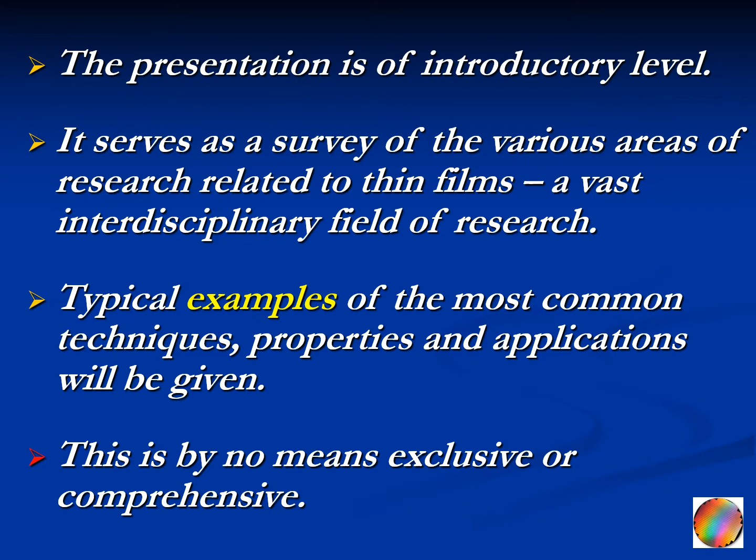Let's first talk about materials research and its importance. Material science and engineering is a discipline at the interface of science and engineering whose activities include the development of new materials with novel properties, improvement of properties of existing materials, studying the relationships between structure of materials at length scales ranging from 1 nanometer to 1 meter.

It also includes the discovery of new methods of economically synthesizing, making, and processing materials and components with desired properties. It also includes development of new techniques for characterizing the structure and properties of materials. Material science and engineering is also important for predicting the performance of materials in engineering applications.

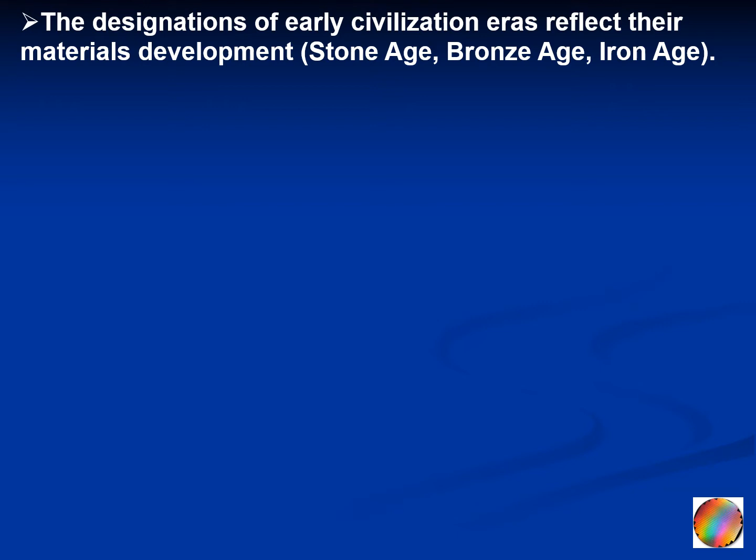The designations of early civilization eras reflect their materials development. The Stone Age, the Bronze Age, the Iron Age are all connected to specific materials. The technological progress in modern societies has been even more intimately associated with advances in material science and engineering.

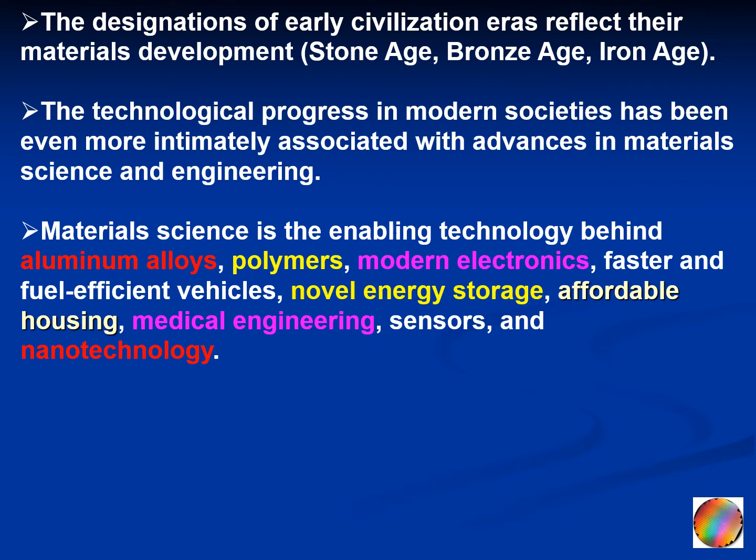Material science is the enabling technology behind aluminum alloys, polymers, modern electronics, faster and fuel-efficient vehicles, novel energy storage, affordable housing, medical engineering, sensors, and nanotechnology.

Materials science lies at the foundation of many areas, including forensics, biomedical applications, aerospace materials, mathematical modeling, craft and design, chemical engineering, quantum physics, and molecular genetics.

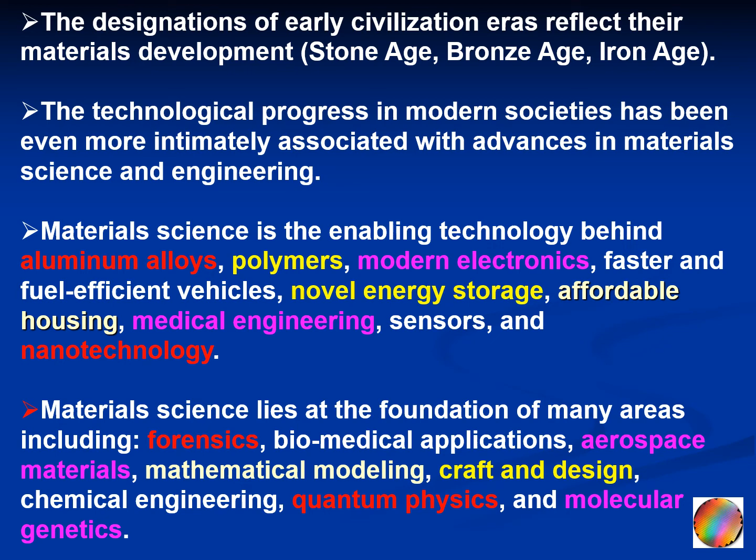The present and future challenges and opportunities in the field of material science and engineering are more exciting than those of the past, as engineers develop materials for more demanding applications.

There is a continuous search for materials with higher stiffness and strength to weight ratios for aerospace applications. Electronic materials that allow faster data processing are being sought. Jet engine materials of lower weight, which allow safe operation at higher temperatures, are being developed.

More corrosion-resistant materials for chemical industries are needed. High-temperature superconductors that may revolutionize the use of electrical power have been discovered recently and are being studied.

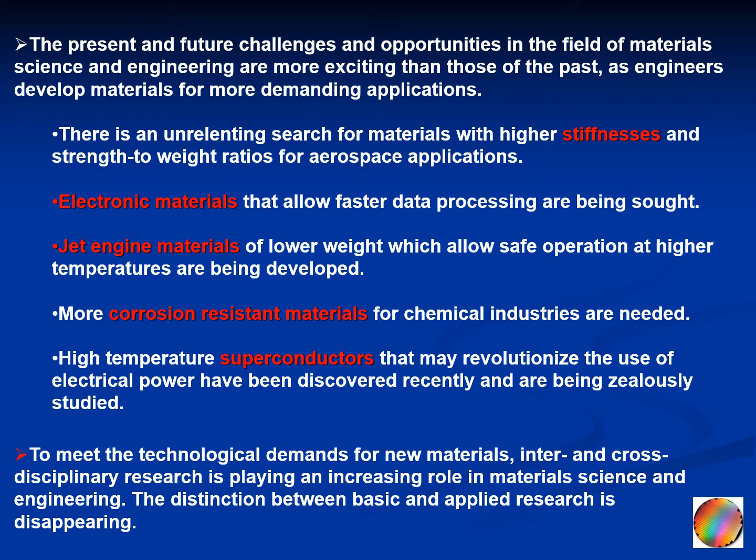To meet the technological demands for new materials, inter- and cross-disciplinary research is playing an increasing role in material science and engineering. The distinction between basic and applied research is disappearing.

What is the connection between materials and industry? Why do we need to do materials research for industrial applications? Major technological breakthroughs came after advances in materials research. Materials research is at the core of modern technology.

Various industries depend heavily on materials research, such as the petrochemical industry and the power industry. Examples of problems tackled by materials scientists include the study of corrosion, the development of ceramics, the development of fuel cells, and the development of sensors for various applications.

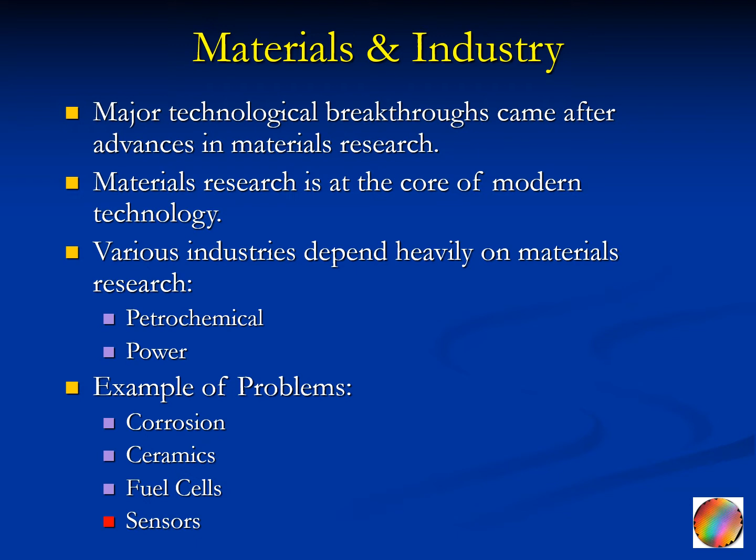So that was a brief introduction about materials research, materials science and engineering, and its importance in our daily life. Let's now start our discussion of thin films, and we will first talk about the deposition techniques that are used to synthesize, to make, to fabricate the thin films.

We have first to talk about surface engineering, which is very related to thin films, because thin film synthesis or deposition can be categorized as a surface engineering process.

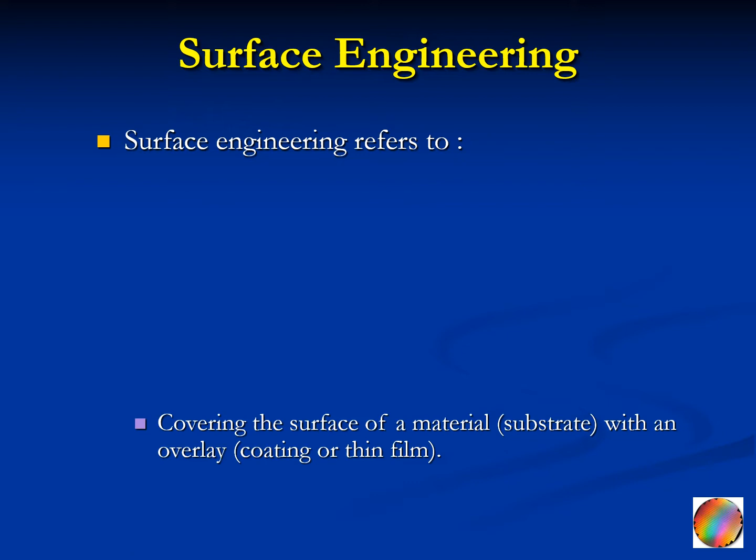Surface engineering refers to two things: covering the surface of a material, like a substrate, with an overlay, with a layer, and that means coating the substrate with a coating or thin film. It can also refer to modification, changing the properties of the surface of a material. So surface engineering can mean any one of these two.

In the first process, in which we cover the surface with a layer, the substrate material is not detectable. In the second process, the substrate material is still present on the surface.

Here are some surface modification techniques used to modify the surface of a material. They can be chemical processes like wet processing, exposing the surface to acidic or basic environments. They can be oxidation, where you let a stream of oxygen at high temperature pass over the surface to oxidize it. They can be anodization of the surface with certain metal. All of these are chemical processes.

We can also have physical processes like sputtering the surface, bombarding it with ions to change its properties. And we can do ion implantation, where we bombard the surface with high energy ions that penetrate the material and change its properties.

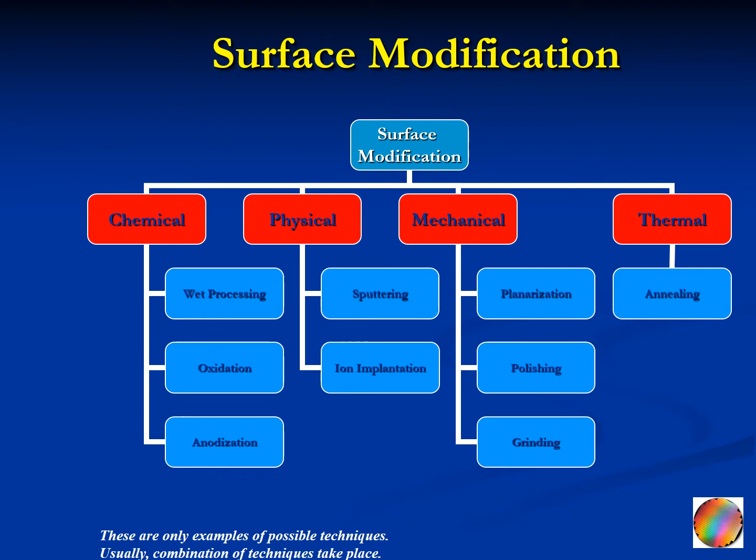Now let's talk about thin films. What is a thin film? The term thin film is applied to layers or coatings which range in thickness from a few atomic layers to several microns. So roughly we can say that the thickness of a thin film ranges from 10 nanometers all the way to 10 micrometers.

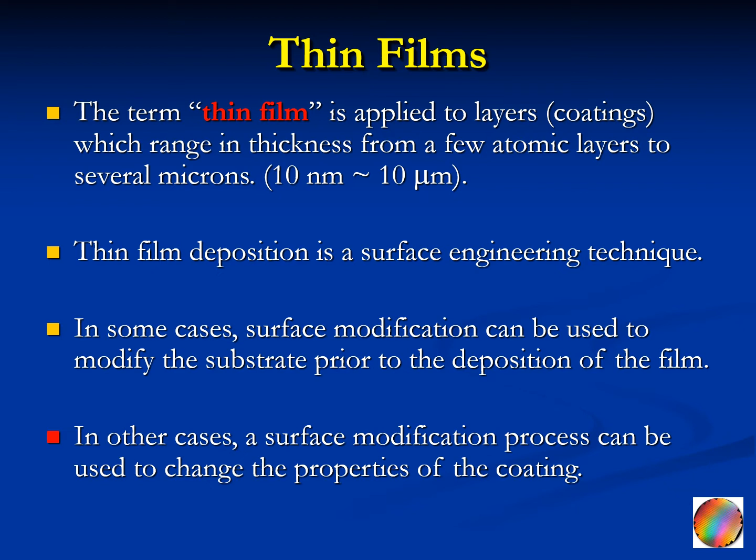Thin film deposition is a surface engineering technique. In some cases, surface modification can be used to modify the substrate prior to the deposition of the film—that means to prepare the substrate to accept the film, you have to do some of the preceding surface modification techniques before deposition. In other cases, a surface modification process can be used to change the properties of the coating after its deposition.

So let's now look at the deposition techniques. How do we make the thin films? How do we synthesize or deposit them?

Any thin film deposition process involves three main steps. First, the production of the appropriate atomic, molecular, or ionic species. You produce the material from which you make the film, and then you carry that material to the substrate, to the surface on which you want to grow the thin film.

The second process is the transport of these species to the substrate through a medium. The medium can be gaseous or liquid. The third step is the condensation on the substrate of these species, either directly or through a chemical or electrochemical reaction, to form a solid deposit, which is what we call the thin film. Now, we will see many techniques, but they all share these three basic steps to synthesize the thin film.

Here is an example of the techniques used to deposit thin films. If you read the literature, you will find hundreds of techniques to synthesize thin films. This is just a sample of the most famous techniques used to make thin films.

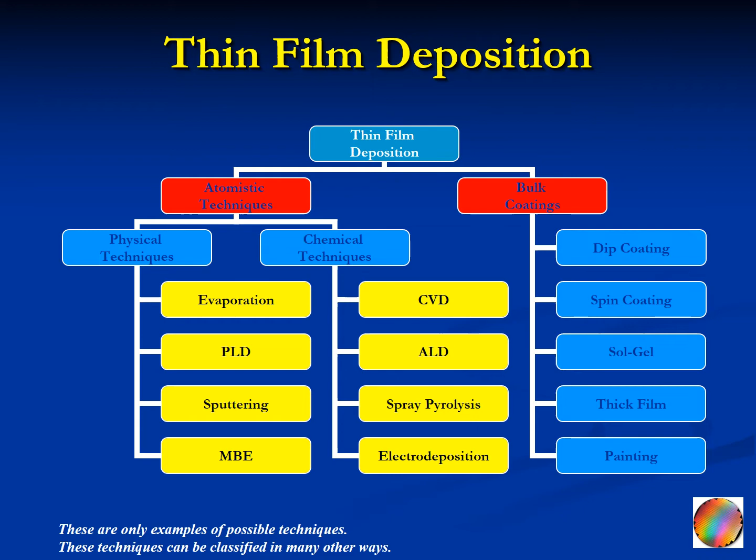The bulk coatings include techniques like dip coating, spin coating, sol gel, thick film, and painting. The way we will go through these processes is we'll classify them as you can see here.

So another way to classify the thin film synthesis techniques is to classify them as vapor techniques, in which the thin film is made in a gaseous medium, or solution techniques, in which the thin film is made in a liquid medium. We will look at these 5 main techniques that are widely used to grow or deposit thin films.

Let's start with the evaporation technique, which is a vapor technique. It goes in a gaseous medium.

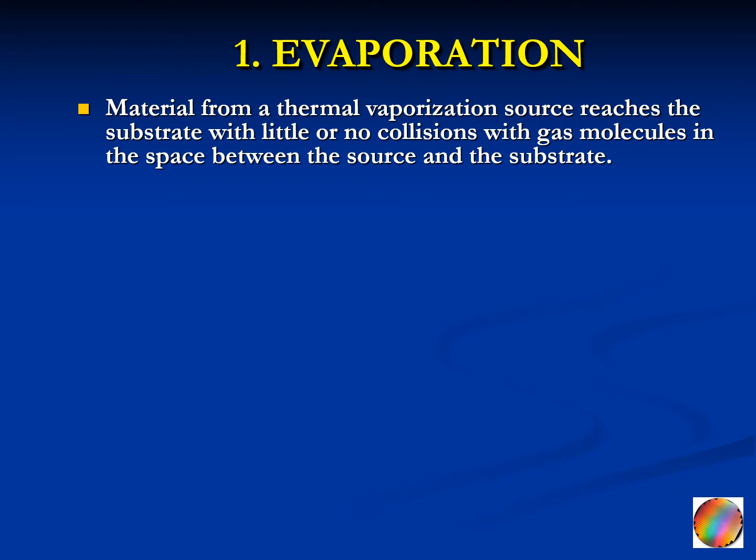These atoms or molecules will travel from the source into the substrate. Once they impinge on the substrate, they form the desired thin film. The substrate can be on top of the source, it can make an angle with the source, and it can also rotate to make the film uniform.

Vacuum deposition takes place in the gas pressure range of 10 to the minus 5 to 10 to the minus 9 torr. By that we mean we need to evacuate the space between the source and the substrate, and that will do two things. First, it will reduce the collisions between the molecules and the gaseous species, the air molecules. Second, it will result in very low contamination of the film, because it's done under vacuum. The only thing that is there are the species that you are vaporizing from the source.

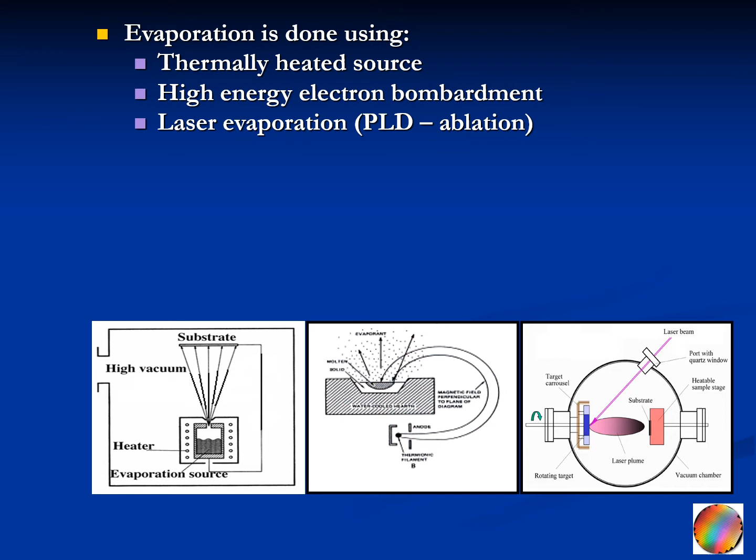The third technique is like the second one, but instead of using an electron beam, you use a laser. You heat the source using a pulsed laser beam, which produces a lot of heat to vaporize the material, and again this vapor will impinge on the substrate and synthesize the desired thin film. This third technique is called pulsed laser deposition or pulsed laser ablation.

Vacuum deposition is used to form optical coatings, permeation barrier films, electrically conducting films, wear-resistant coatings, and corrosion protective coatings. These three techniques are broadly called PVD techniques, which stands for physical vapor deposition.

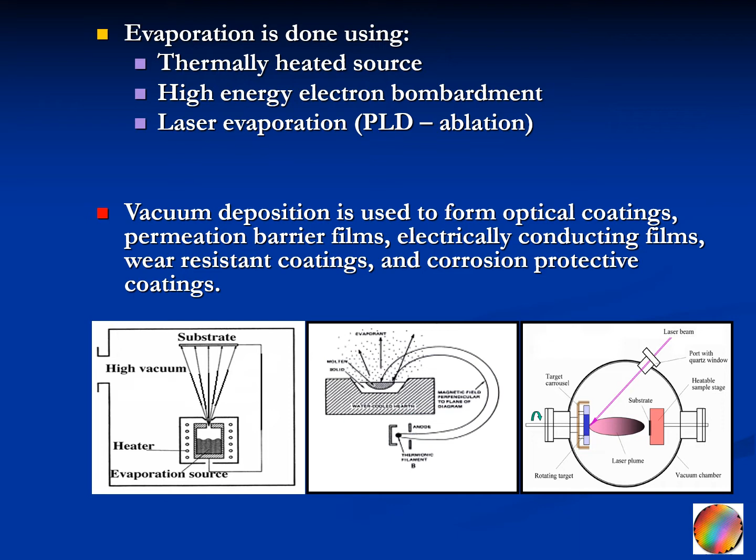Surface atoms are physically ejected by momentum transfer from the ions. Sputtered atoms travel until they strike a substrate. So here it is like evaporation, except that instead of heating, now we bombard with ions. But the end result is the same: species come out of the target, travel through some distance to impinge on the substrate and make the thin film. So sputtered atoms travel until they strike a substrate, where they deposit to form the desired layer.

The bombarding particles are ions, created by applying a high voltage to an inert gas, forming what we call a plasma. The target can be an element, an alloy or mixture, or a compound.

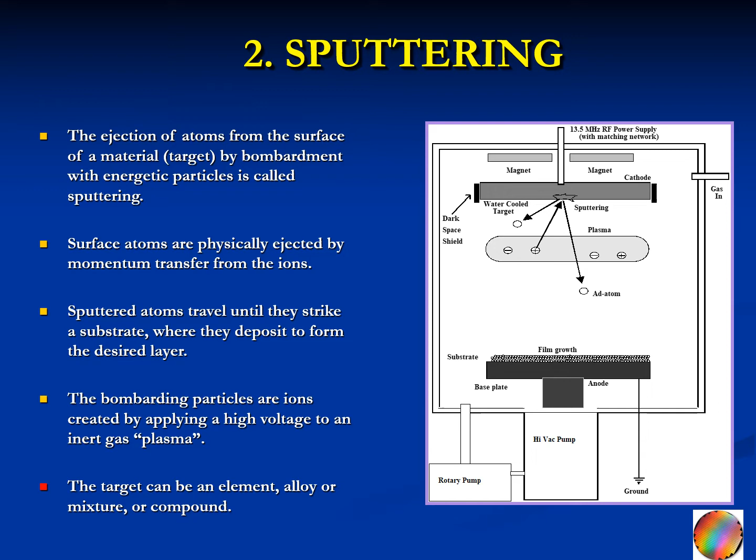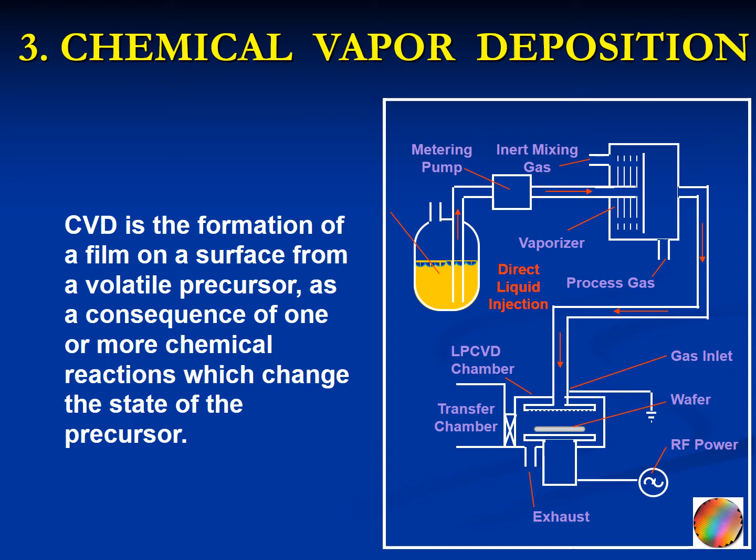The third vapor technique is an extremely important technique, very widely used, and that is chemical vapor deposition, abbreviated as CVD. CVD is the formation of a film on a surface from a volatile precursor in the gaseous state, as a consequence of one or more chemical reactions which change the state of the precursor. That is illustrated in this diagram here. The CVD technique is a very complicated technique, but it is worth the complication because of the advantages that we will talk about shortly.

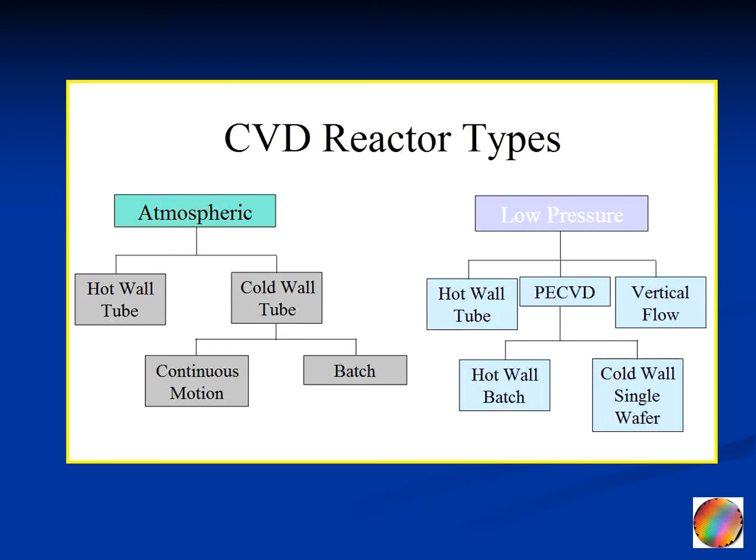CVD can come in many variants. Here are some of the techniques, all of which fall under chemical vapor deposition, and each one is very widely used to grow certain types or classes of materials. There are many variants; we have seen just some of them. One of the most commonly used is MOCVD, metal organic chemical vapor deposition. You can also have vapor phase epitaxy, atomic layer deposition, and even MBE, molecular beam epitaxy, which can be broadly categorized as a CVD technique. What are the advantages of CVD?

One advantage is the high growth rate achieved by this technique, which makes it economical. You can grow very thick films in a relatively shorter time compared to other techniques. It can deposit materials which are hard to evaporate, so when evaporation by thermal, E-beam, lasers, or sputtering fails, CVD offers an alternative that can work. It is characterized by good reproducibility of the films grown, and it can grow epitaxial films, which is an extremely important advantage of the CVD technique.

But there are some disadvantages of this technique, such as the high temperatures. You have to grow films on substrates heated to very high temperatures compared to other techniques. It is a very complex process, and sometimes the gases used are toxic and corrosive.

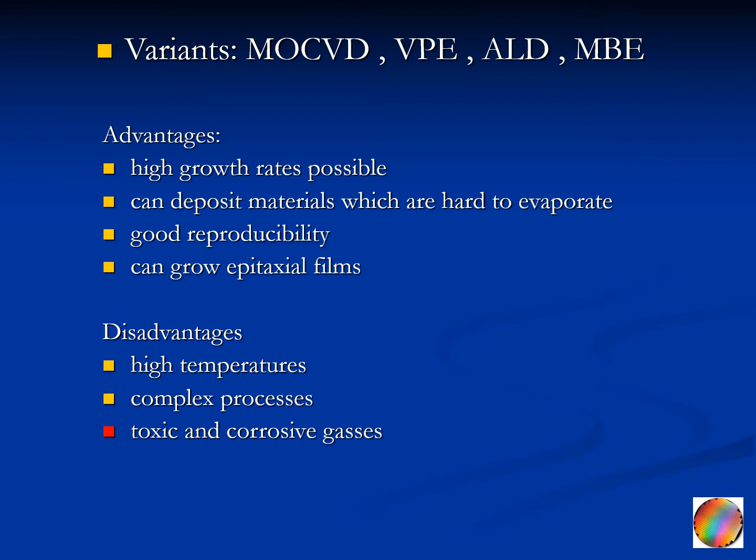So these are the vapor techniques. We talked about three of them: evaporation, sputtering, and chemical vapor deposition. And we have seen that under each one of them, you can have many processes.

Let's now move into the solution techniques, techniques that involve the presence of liquids. Here we will talk about two main techniques. The first one is the sol gel, and we will see that under the sol gel there are many sub-techniques.

This process involves the transition of a material from a sol with fluid-like properties to a gel with solid-like properties. The sol is made of colloidal solid particles of submicron diameter, usually inorganic metal salts, dispersed in a liquid metal organic precursor called an alkoxide, dissolved in a solvent. Aggregation or polymerization leads to the development of an interconnected solid network with an interspersed continuous liquid phase, and that is the gel.

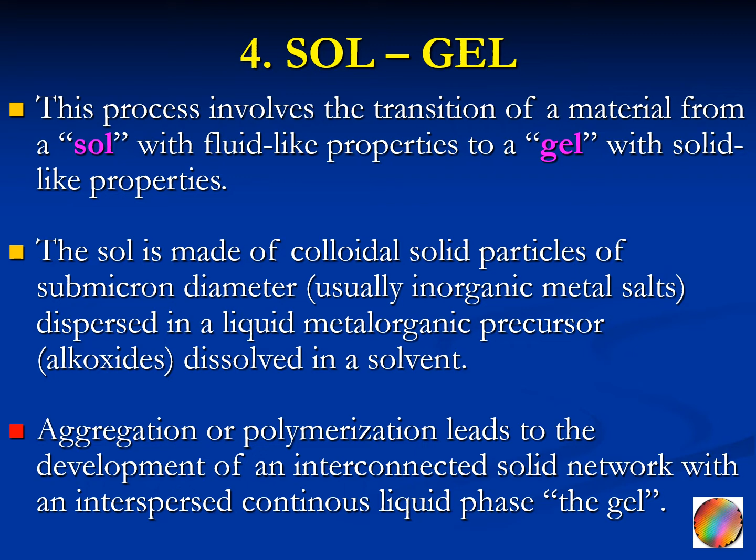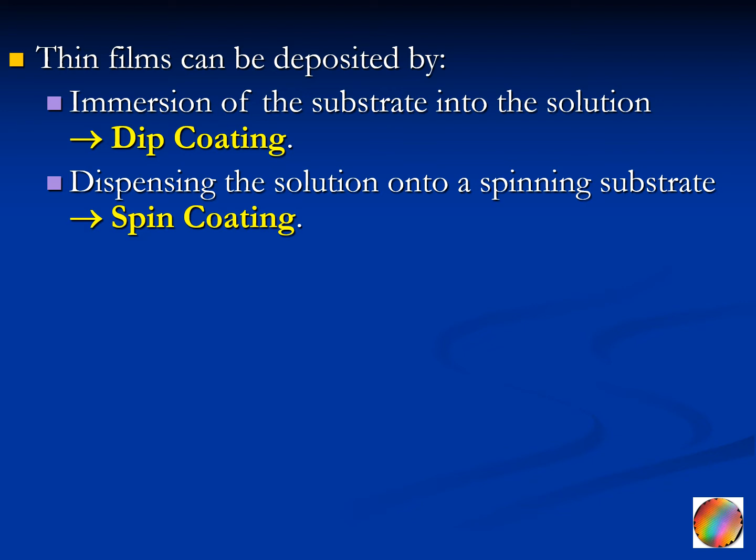So the gel is made. Now, how do we make the film? Thin films can be deposited by immersion of the substrate into the solution; in that case it is called dip coating. Or by dispensing the solution onto a spinning substrate, called spin coating. Or by spraying the solution onto the substrate, called spray pyrolysis. So dip coating, spin coating, and spray pyrolysis are variants of the sol gel technique.

Following film deposition, thermal treatments cause a host of other processes like drying, solvent evaporation, densification, and crystallization that shape the structure of the coating. Usually sol gel is done at room temperature, so you have to heat the film after deposition to solidify it and give it better crystallinity.

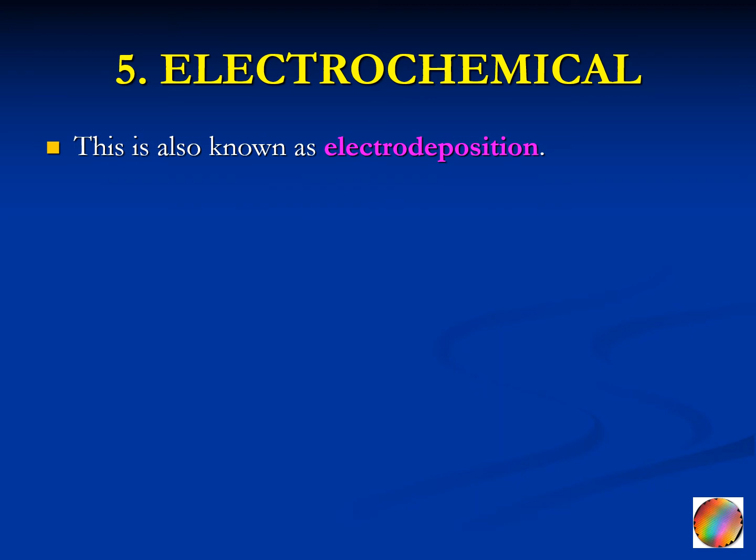The second solution technique is called the electrochemical technique, also called electrodeposition for brevity. Coatings can be made by anodic or cathodic synthesis. In the anodic method, a metal ion or complex is oxidized at the electrode surface. In cathodic synthesis, the cathodic process is used to generate a base at an electrode surface. Metal ions or complexes are then hydrolyzed by the electrogenerated base to form a cathodic deposit.

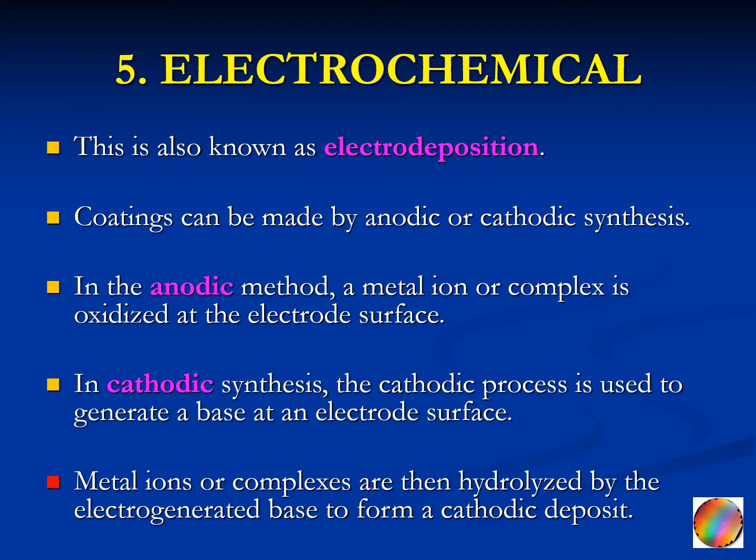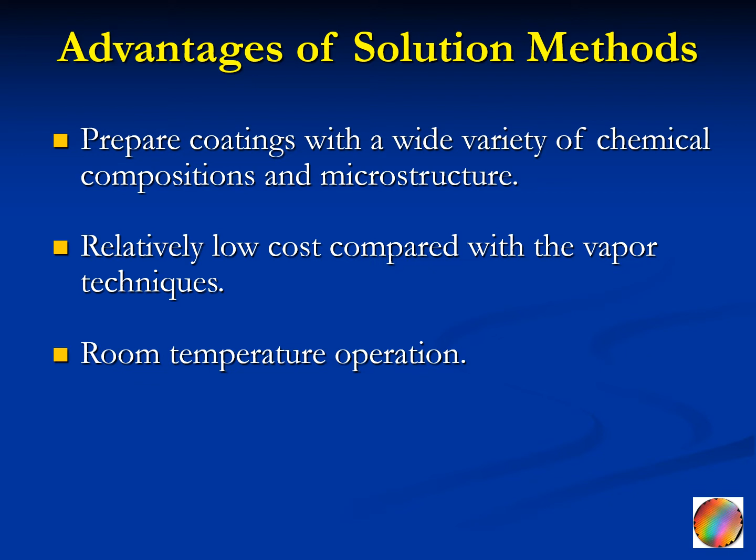What are the advantages of solution methods? With solution methods, you can prepare coatings with a wide variety of chemical compositions and microstructures. They are relatively cheap compared with vapor techniques, since solution techniques do not need any vacuum. They operate at room temperature, so you don't have to heat the substrates before film deposition. They can deposit on any geometry, flat, cylindrical, or spherical, and they are commercial because they can produce coatings on a large scale.

Finally, let's talk about nanostructured coatings.

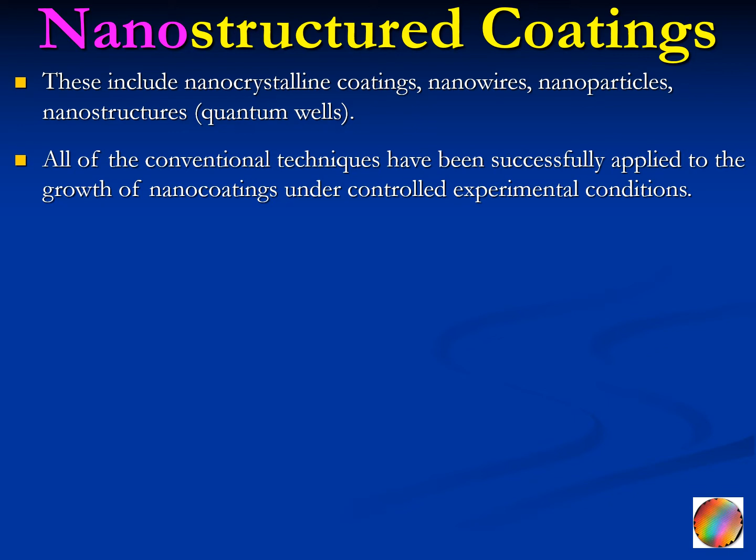These include nanocrystalline coatings, nanowires, nanoparticles, and other nanostructures such as quantum wells. All of the conventional techniques that we talked about have been successfully applied to the growth of nanocoatings under controlled experimental conditions. There are two approaches to nanogrowth: the first is the top-down approach, like the one used in lithography, and the second is the bottom-up approach, where you grow the nanostructures from the bottom and let them grow vertically upward.

Some techniques produce nanostructures directly. Other techniques produce nanostructures by post-deposition. That means you make the film, and then after the film, post-deposition, you let it go through one or more of these processes to produce the nanostructures. The post-deposition processes include annealing, heating the film under certain atmosphere at certain temperature for a certain duration of time, or chemical etching, ion beam bombardment, or laser processing. All of these have been proven to produce nanostructured coatings out of typical or regular thin films.

And that brings us to the end of the second part of the seminar, which is the deposition of thin films. Let's now move into the third part, in which we talk about the growth mechanisms of thin films.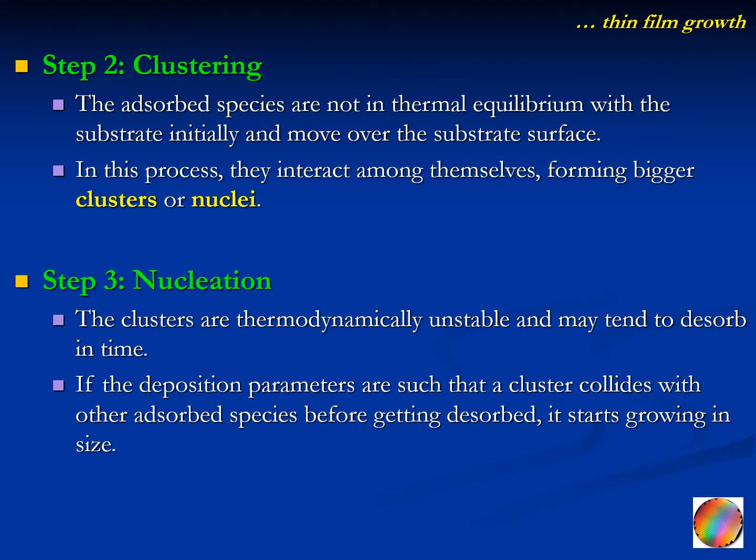And that will lead to the third process, which is called nucleation. The clusters are thermodynamically unstable and may tend to desorb in time. If the deposition parameters are such that a cluster collides with other adsorbed species before getting desorbed, it starts growing in size. After reaching a certain critical size, the cluster becomes thermodynamically stable and the nucleation barrier has been overcome, and that's the nucleation process.

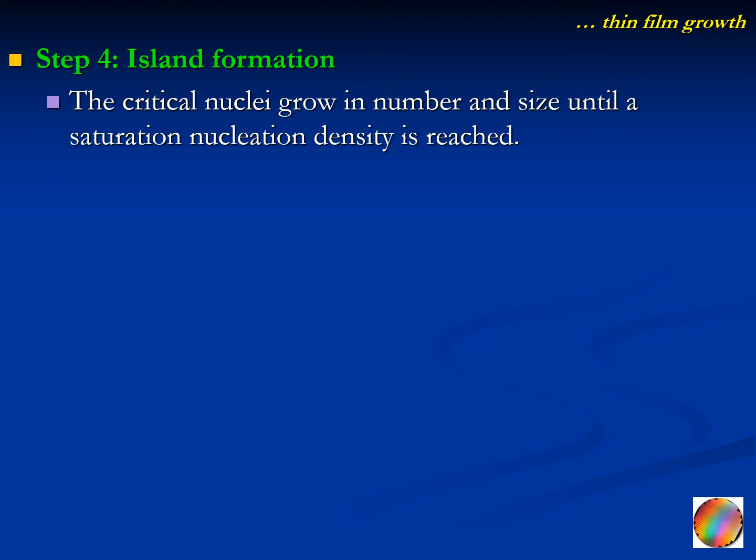After the nucleation comes the island formation. So they go step by step. The critical nuclei grow in number and size until a saturation nucleation density is reached. This is influenced by the energy of the incident species, the rate of impingement, the activation energies of adsorption, desorption, thermal diffusion, and the temperature, topography, and the chemical and crystalline nature of the substrate. So it is a very dynamic, thermodynamic process.

A nucleus can grow both parallel to the substrate by surface diffusion and perpendicular to the substrate by direct impingement of the incident species. However, the rate of lateral growth is much higher than the perpendicular growth. The grown nuclei are called islands.

After the formation of islands, we have coalescence. What is coalescence? It's merging or melting or fusion of the islands. So, in this stage, the small islands start coalescing, merging together with each other in an attempt to reduce the substrate surface area. This tendency to form bigger islands is termed agglomeration and is enhanced by increasing the surface mobility of the adsorbed species, for example, by increasing the substrate temperature.

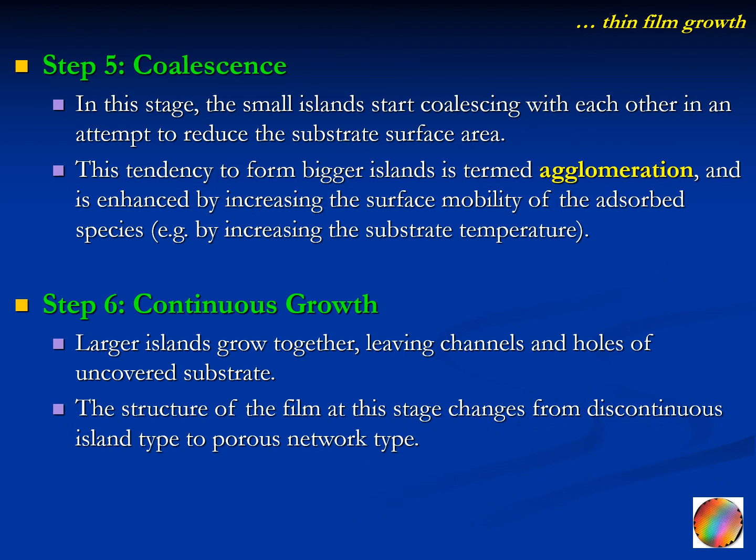The final step is continuous growth. Larger islands grow together, leaving channels and holes of uncovered substrate. The structure of the film at this stage changes from discontinuous island type to porous network type. Filling of the channels and holes forms a completely continuous film.

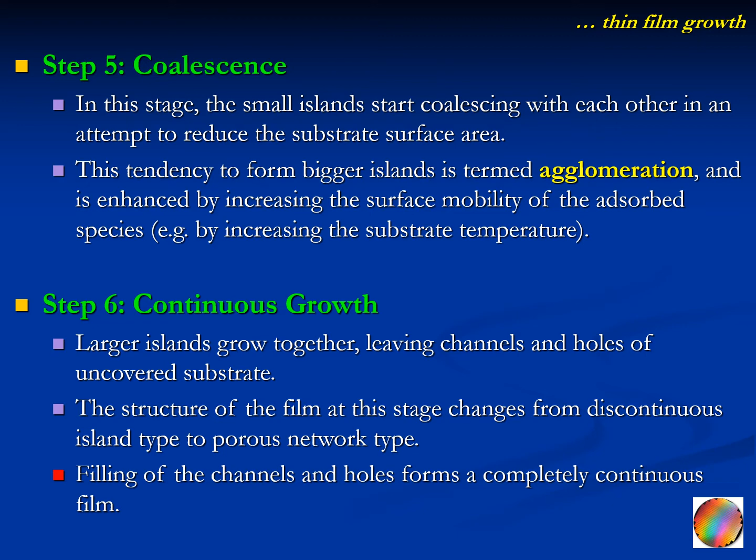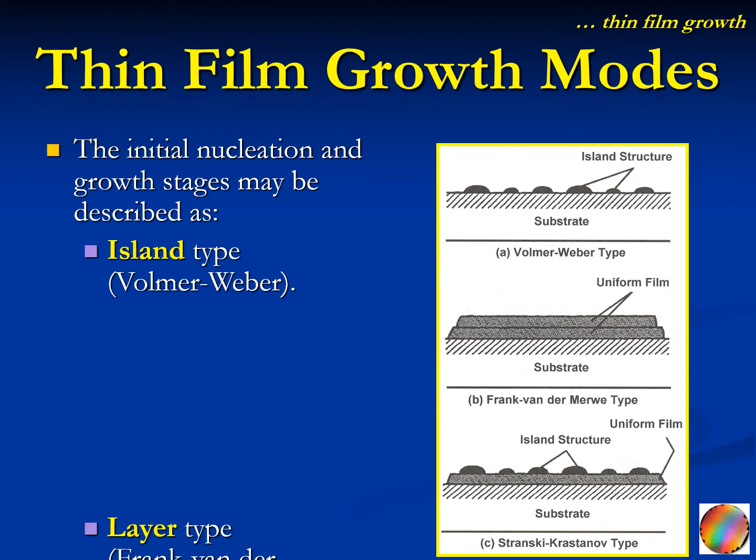Here is another way to look at the growth process, and these are called growth modes. We can have three growth modes. The initial nucleation and growth stages may be described as island type, layer type, or mixed type, mixed of island and layer types.

The crystallographic orientations and the topographical details of different islands are randomly distributed. When they touch each other during growth, grain boundaries and various point and line defects are incorporated into the film due to mismatch of geometrical configurations and crystallographic orientations. If the grains are randomly oriented, the film is polycrystalline. However, if the grain size is small, the film is highly disordered and is amorphous.

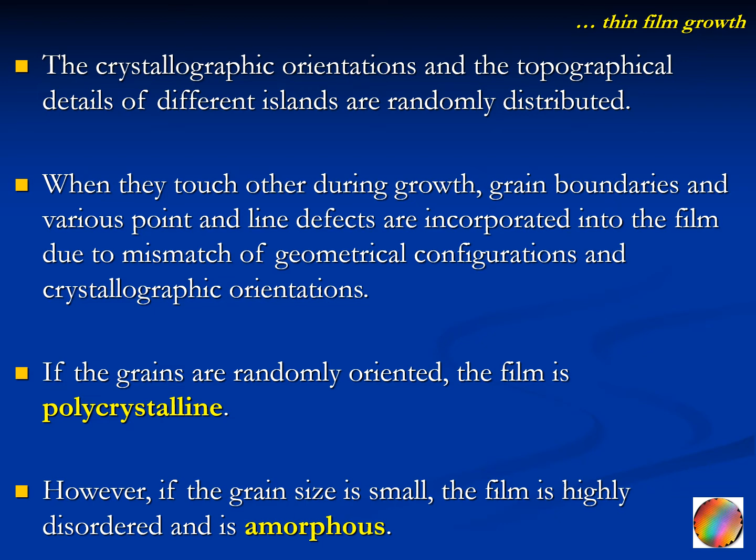So, this is a brief description of the growth of thin films. Many studies, theoretical studies and modeling, are dedicated to studying the growth dynamics of thin films.

With that, we will now move to the fourth part of the presentation, which is about the properties of thin films. There are, of course, tons of properties associated with thin films, but we will talk about just a few of them as examples of the rest.

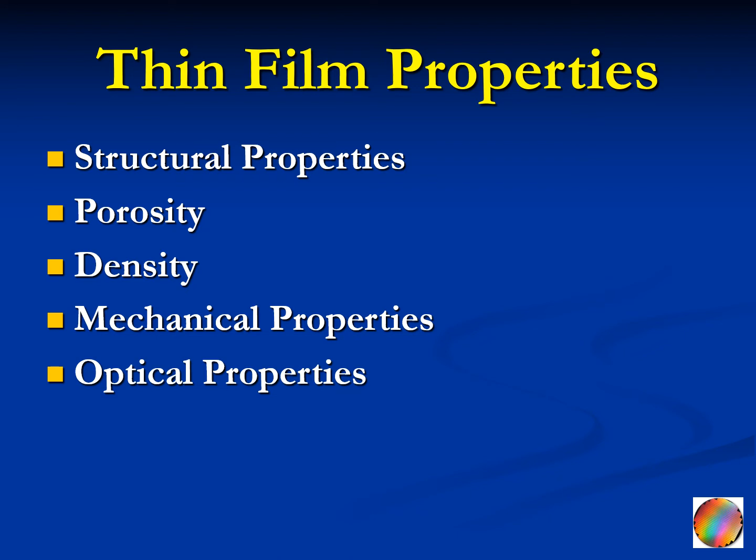We will talk about the structural properties, porosity, and density. Then we will talk about mechanical properties, optical properties, and electrical properties.

Let's start with the structural properties. The structure of thin films is strongly related to the deposition technique and the deposition conditions. The local arrangement of atoms in a film may be either regular, crystalline, or irregular, amorphous.

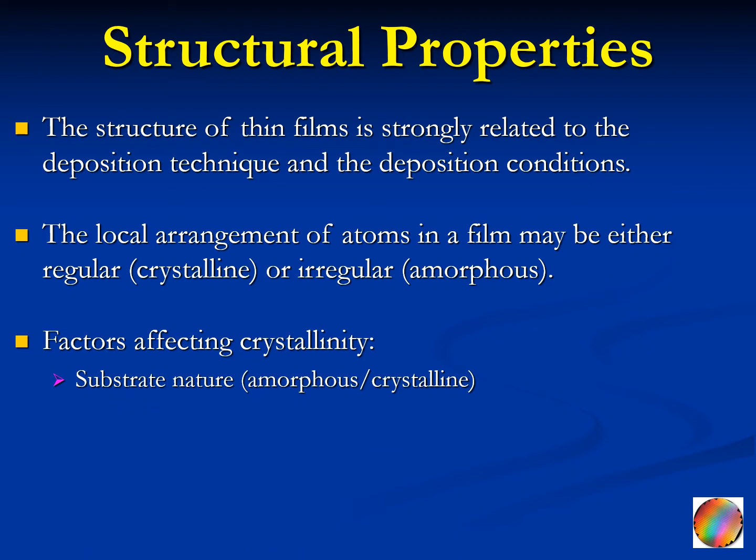Factors affecting crystallinity include the substrate nature: is it an amorphous substrate like glass, or a crystalline substrate like a silicon wafer? Crystallinity is also affected by the substrate treatment: is it polished, smooth, and etched?

It is definitely affected by the substrate temperature, and if there is a lattice mismatch between the substrate and the film to be grown on that substrate. Finally, crystallinity is affected by the deposition technique itself and the deposition parameters during the growth and the post-deposition conditions after the growth.

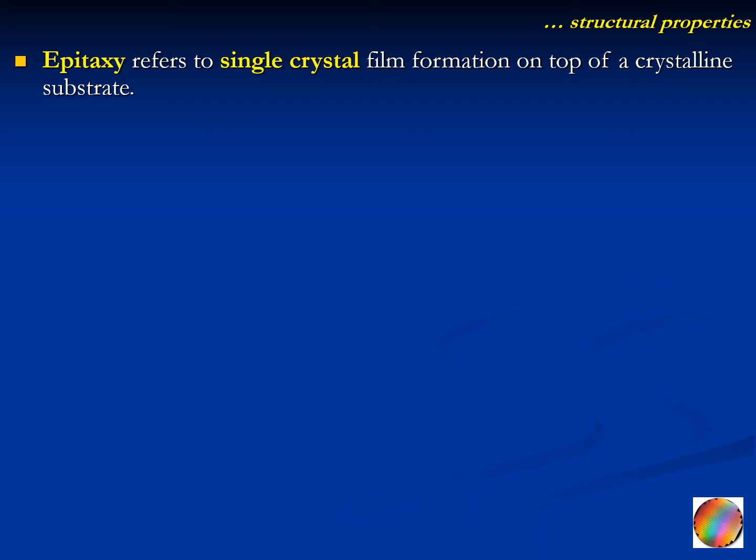Epitaxy refers to single crystal film formation on top of a crystalline substrate. The conditions favoring epitaxial growth are high surface mobility, obtained with high substrate temperature, a clean, smooth, and inert substrate surface, and crystallographic compatibility between the film and the substrate. Do they have the same crystalline structure, like cubic on cubic, hexagonal on hexagonal, and so on?

Generally, the grain size of the film increases with its thickness up to a certain thickness. The grain size increases with substrate temperature, and it can also increase with annealing temperature after the growth.

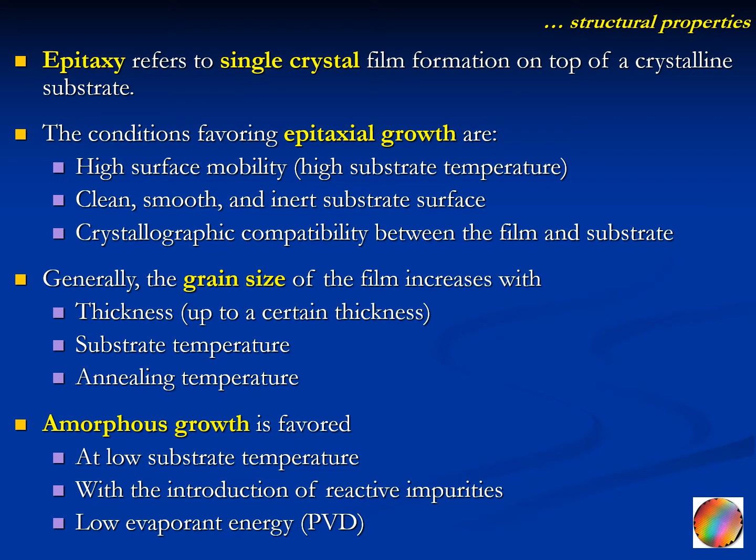Amorphous growth is favored at low substrate temperature. It is favored with the introduction of reactive impurities, and it is favored for low evaporant energy techniques, such as the physical vapor deposition techniques: pulse laser deposition, E-beam, and thermal evaporation.

Let's now talk about structural defects. Structural defects are incorporated into thin films either during growth or by post-deposition processing. These include grain boundaries, dislocation lines, stacking faults, and point defects.

These defects may arise from misfits between different islands, substrate-film lattice mismatch, and the presence of inherent large stresses in the film.

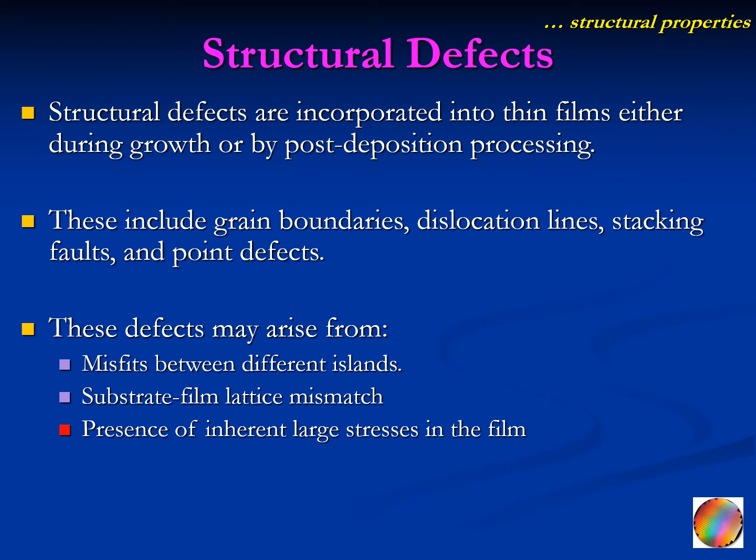Porosity is a property that is very related to the structural properties of the film. In general, porosity is not desirable in a film. However, certain applications, such as catalysis and sensing, require porous films.

There are many types of porosity, like open porosity, in which pores are connected, closed porosity, in which pores are isolated from each other — in that case they are called voids — and pinholes, in which pores extend through the deposit from the surface to the interface.

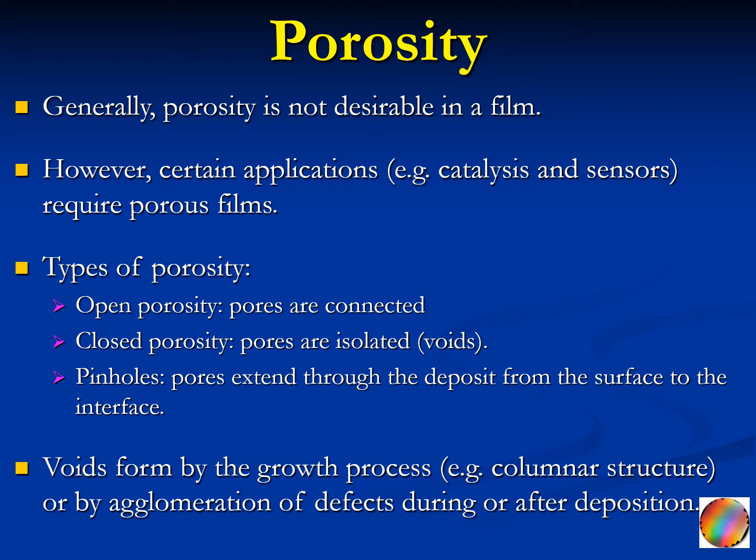Voids formed by the growth process, like columnar structure, or by agglomeration of defects during or after deposition.

Porosity may affect film properties in a number of ways, since it will result in high chemical etch rate, high corrosion rate, easy contamination, reduced adhesion, and reduced refractive index.

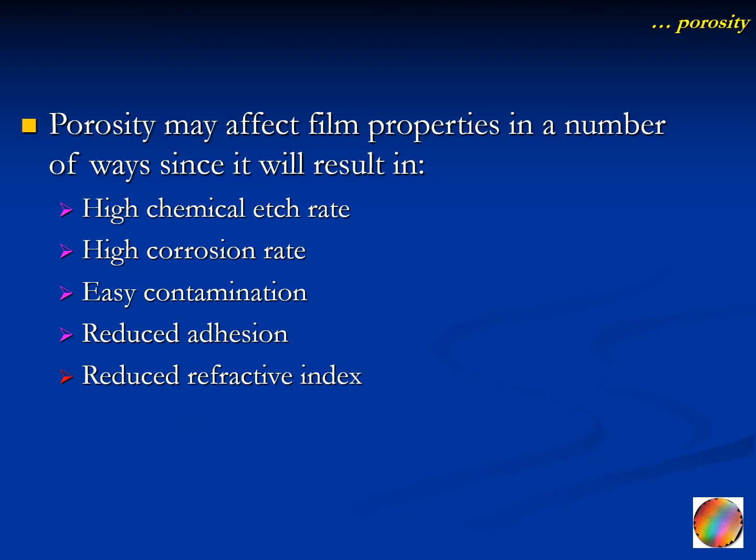Another property which is very related to structural properties is the density of the film. Most deposition techniques create film densities that deviate strongly from the bulk density of the respective material.

Lower density results from gas incorporation during the growth method, crystalline disorder and voids, presence of foreign materials, and material that is not stoichiometric.

The properties that are affected by the density include the optical properties, especially the refractive index, adhesion to the substrate, crystallization of the film, stress development in the film, and the chemical stability or instability of the film.

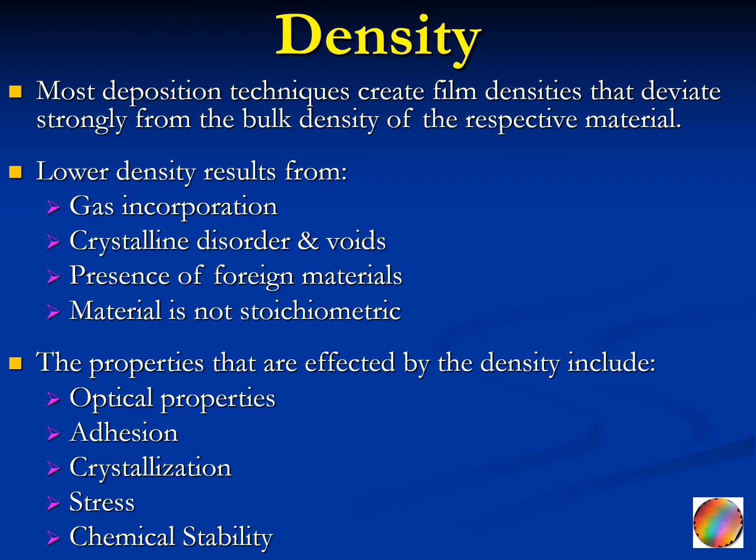Let's now move into the mechanical properties of the films. We talked about the structural properties. Now let's talk about the mechanical properties of the film.

The mechanical properties of thin films are different from those of the bulk material because of the unique microstructure and density of thin films, the large surface to volume ratio, the reduced dimensions of the films, and the constraints caused by the substrate. The mechanical properties of interest for thin films include stress, hardness, elastic modulus, and adhesion.

So let's talk about each one of these, starting with the stress. Atomistically deposited films have residual stress, which may be tensile or compressive.

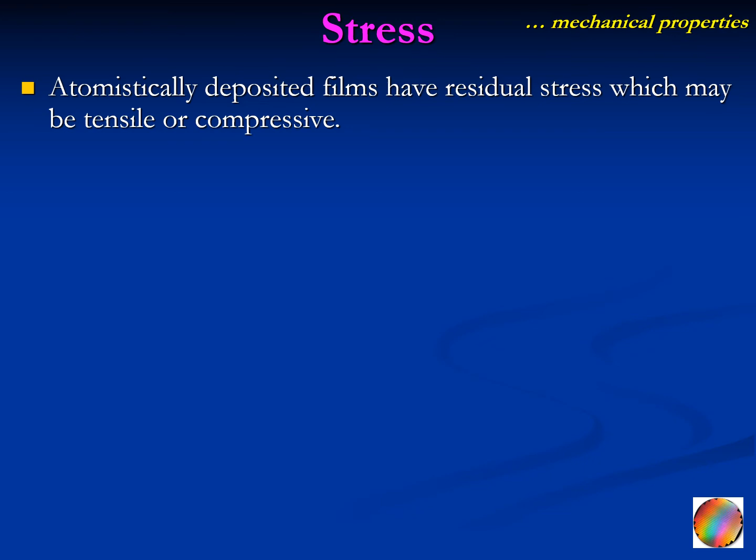The sources of stress include different coefficients of thermal expansion between the film and the substrate, atoms not being in their most energetically favorable positions, and phase changes in the film material after deposition. These residual stresses are very sensitive to substrate configuration and deposition parameters. Lattice strain is caused by residual stress and represents stored energy.

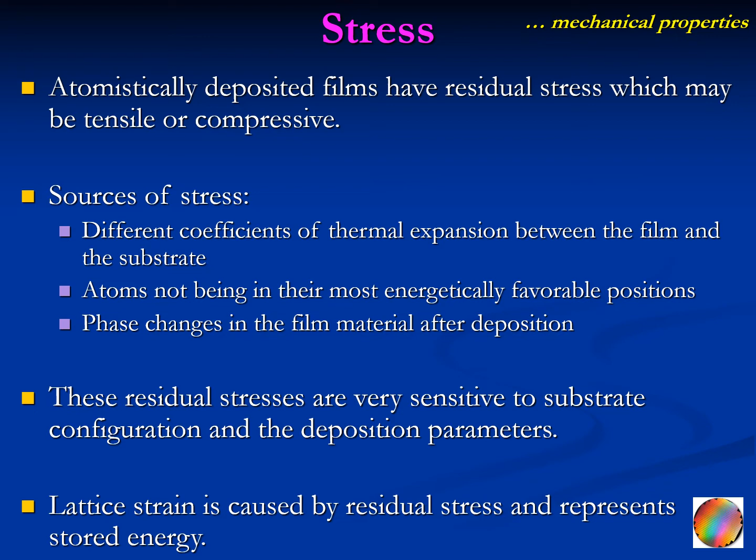Film stress is an important factor in the adhesion and stability of films. High compressive stress produces blistering of the film from the substrate, removing the film from the substrate. High tensile stress produces micro cracking of the film, and the cracks tend to meet orthogonally and form polygon islands.

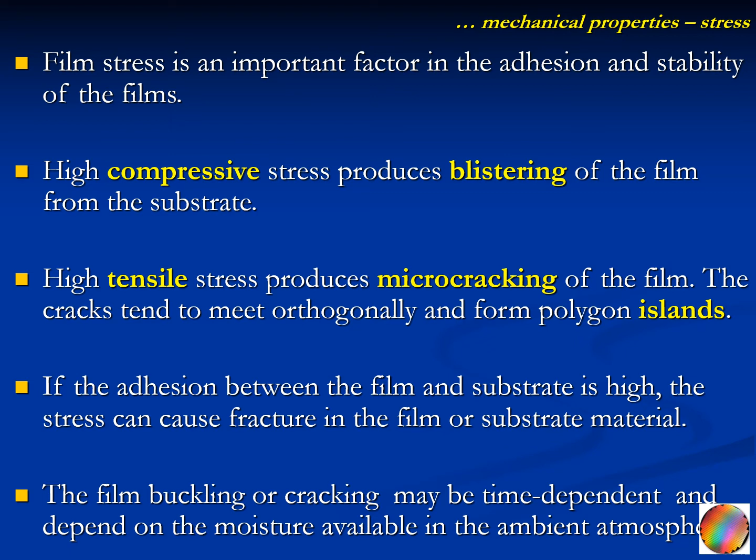If the adhesion between the film and the substrate is high, the stress can cause fracture in the film or substrate material. The film buckling or cracking may be time dependent and depends on the moisture available in the ambient atmosphere.

The second mechanical property is the elastic modulus. An accurate determination of the elastic properties of the coating is desirable for choosing the correct coating material and film thickness to prevent plastic deformation or cracking of brittle materials. The elastic modulus is defined as the stress versus strain for the material under elastic deformation.

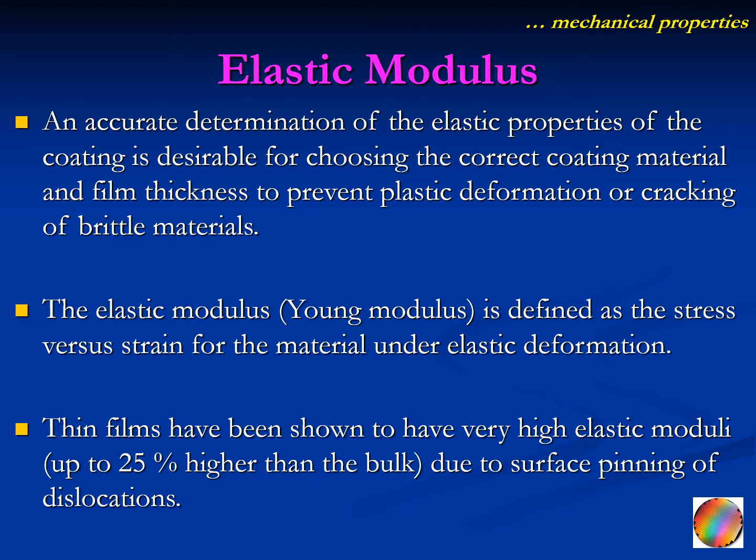Thin films have been shown to have very high elastic moduli, up to 25% higher than the bulk, due to surface pinning of dislocations.

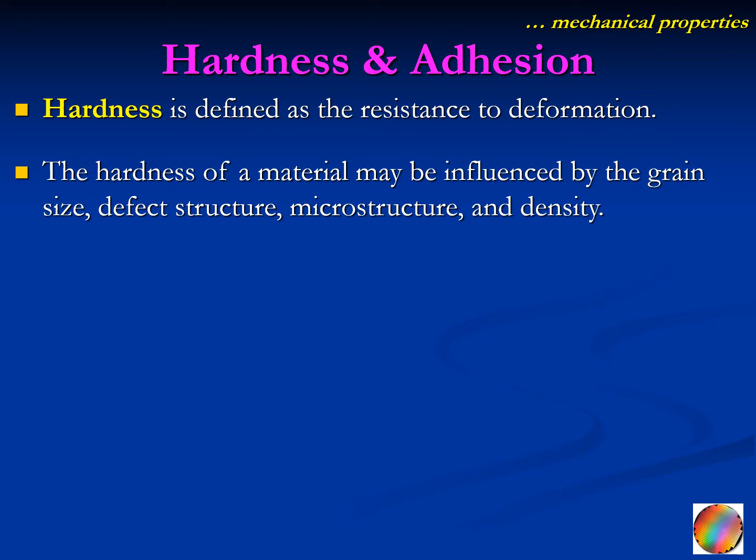Finally, let's talk about hardness and adhesion. Hardness is defined as the resistance to deformation. The hardness of a material may be influenced by the grain size, defect structure, microstructure, and density.

For all practical applications of thin films, a certain degree of adhesion is required to guarantee the functionality of the coated part. The quality of adhesion mainly depends on the interface layer between the coating and the substrate. Adhesion is defined as the work necessary to separate atoms or molecules at the interface.

Finally, the third type of properties - we talked about structural and mechanical - the third properties are the optical properties.

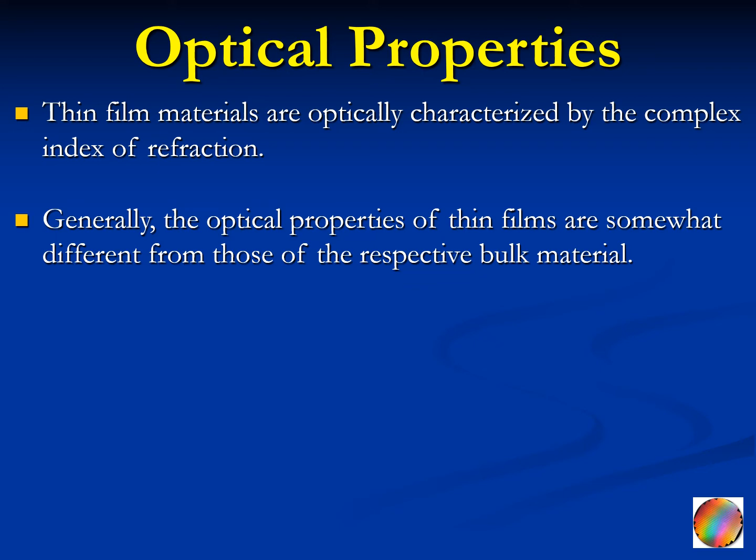Thin film materials are optically characterized by the complex index of refraction. Generally, the optical properties of thin films are somewhat different from those of the respective bulk material. The observed values of the refractive indices are usually lower, and the extinction coefficients are higher than the optical constants of the same bulk material.

Additionally, the resulting film properties are strongly influenced by the deposition method and the selected deposition conditions.

When a beam of light is incident on the surface of a sample, part of it is reflected, part is absorbed in the film, and the remaining part is transmitted through the film. If the surface is rough, scattering takes place. So we have four processes: reflection, absorption, transmission, and scattering. All of these properties are functions of the index of refraction.

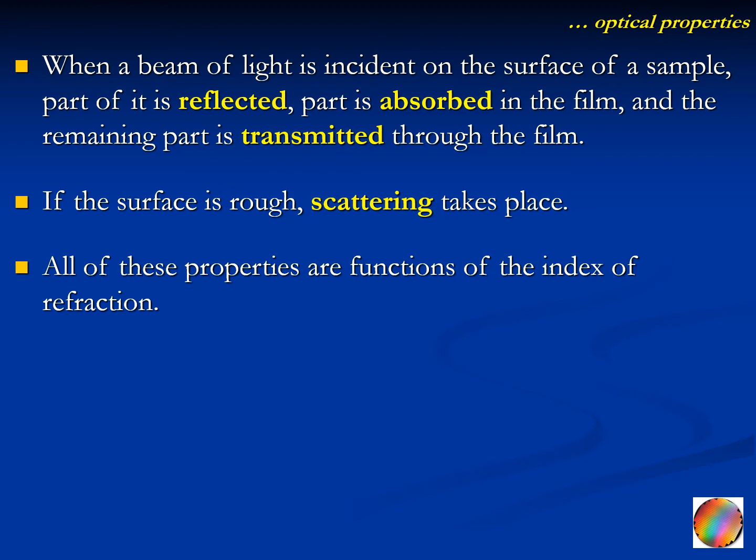Absorption in metals is caused by free carriers. Absorption in insulators is caused by the band gap. In both types of materials, there is additional absorption related to defects such as structural or chemical defects.

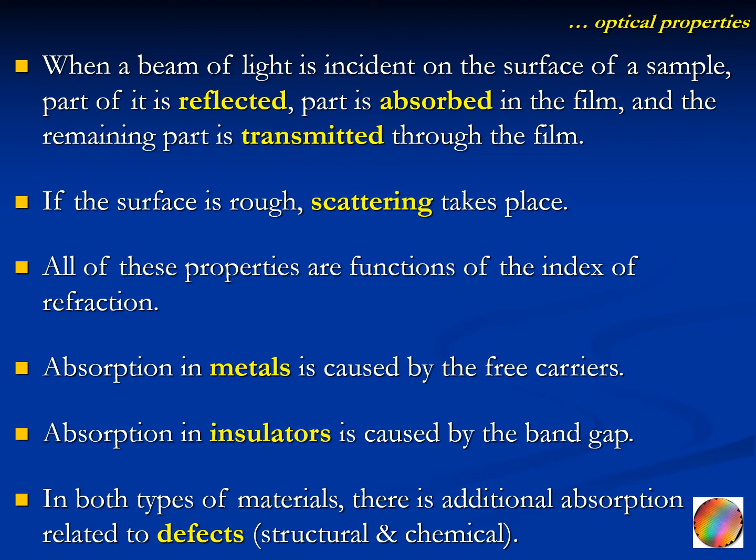Metals are characterized by high reflectance and therefore they are opaque. Insulators are characterized by their high visible transparency.

Luminescence refers to the emission of light by the material. This can be induced by light, called photoluminescence. It can also be induced by heat, thermoluminescence, by electrons, cathodoluminescence, or chemical reactions, called chemoluminescence. In semiconductors, luminescence yields or can yield information on the band gap of the material.

It can also originate from defects and impurities, and therefore it can yield very valuable information about these defects - their density, location in energy, and nature.

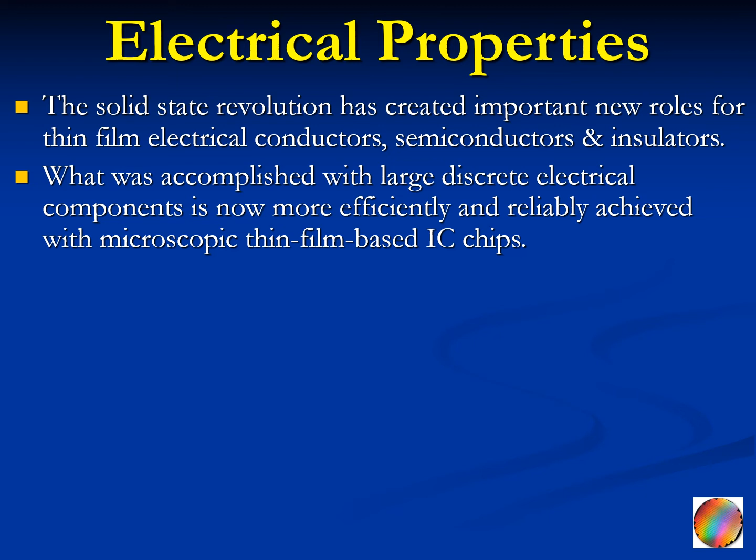Finally, we talk about the electrical properties of thin films. The solid-state revolution has created important new roles for thin film electrical conductors, semiconductors, and insulators. What was accomplished with large discrete electrical components is now more efficiently and reliably achieved with microscopic thin film-based integrated circuit chips.

A current of density J is said to flow when a concentration of carriers with charge Q move with velocity V past a reference plane in response to an applied electric field. These quantities are related by the famous equation, related by Ohm's law, as we can see here.

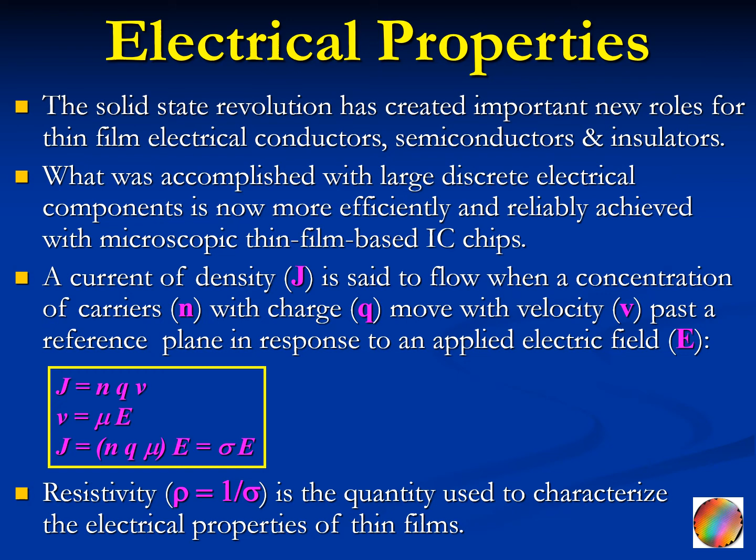Resistivity, which is the reciprocal of conductivity, is the quantity used to characterize the electrical properties of thin films. There are two approaches to study the conductivity: an empirical or experimental approach, which relates the conductivity to temperature, composition, defects, and electric field, and a fundamental theoretical approach, which relates the conductivity to the band structure of the material.

Important factors that distinguish the electrical properties of thin films from the bulk properties include size effects such as surface scattering, quantum mechanical tunneling, the method of preparation, electrode effects—do they form ohmic or rectifying contacts—the degree of film continuity, the existence of high electric field conduction phenomena, and high chemical reactivity such as aging, water absorption, and oxidation.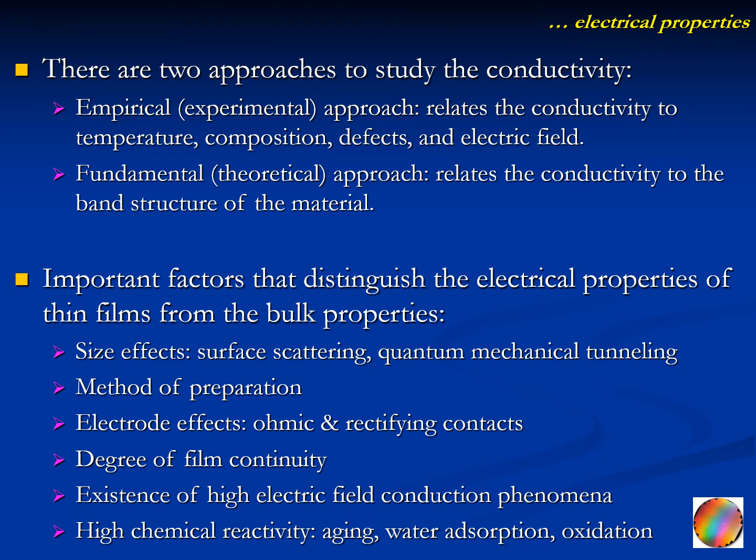Let's now talk about the electrical properties of metallic films. The total resistivity of a bulk metal is the sum of the thermal resistivity due to temperature, the impurity resistivity due to the presence of impurities in the metal, and the defect resistivity due to the presence of defects in the material. Thin films have additional scattering from film surfaces and grain boundaries. Therefore, thin metallic films always have resistivities higher than that of the bulk.

What about insulating films? These materials are characterized by the presence of an energy gap in their band structure. The band gap ranges from something like 0.6 eV in germanium all the way to 10 eV in silicon dioxide. An insulator is a material that possesses very few charge carriers, a consequence of the large energy gap of these materials.

However, insulating films are generally amorphous. Thus, fuzzy tails arise both at the top of the valence band and the bottom of the conduction band. These tails extend into the gap and overlap to form a continuous electron state density. When this happens, insulators become semiconductor-like.

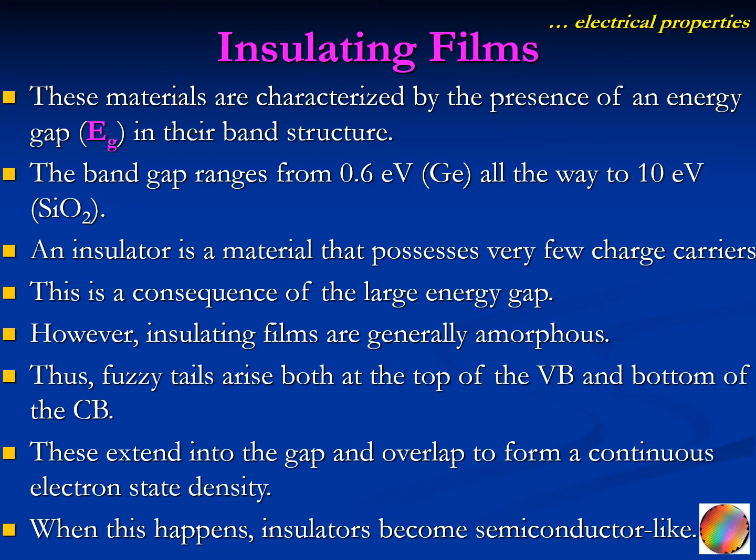Due to structural defects, there may be a relatively high density of charge carriers. They tend to be localized or trapped at these defects for long times, and the insulating behavior stems from such carriers having low mobility. The resistivity of semiconductors can be lowered and controlled by the addition of intentional impurities, a process called doping.

When an insulator is sandwiched between a combination of metal and semiconductor electrodes and an electric field is applied, electrons, holes, and ions may migrate, giving rise to measurable currents. The conduction mechanisms in insulators include Schottky emission, tunneling, surface charge layer conduction, ionic conduction, and intrinsic conductivity.

This is about the electrical properties, and of course there are other important properties we didn't talk about. They are specific to certain applications, like thermal properties, chemical properties and composition, and magnetic properties, which are very important, for example, in the field of recording materials and superconducting materials.

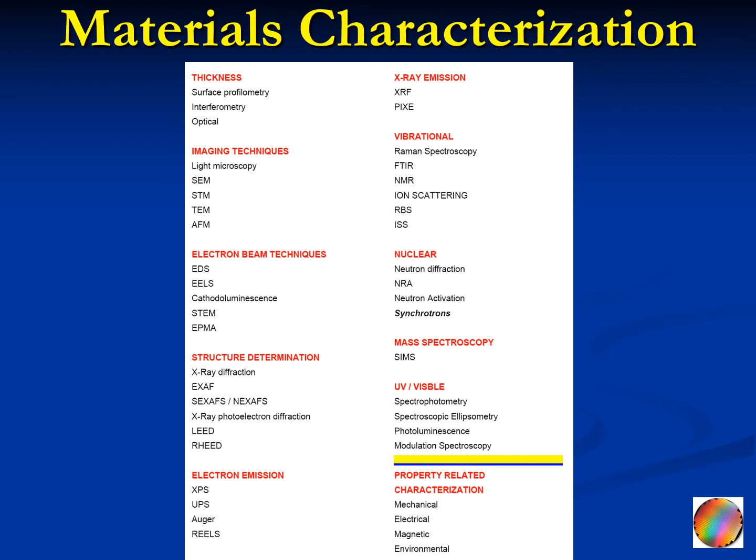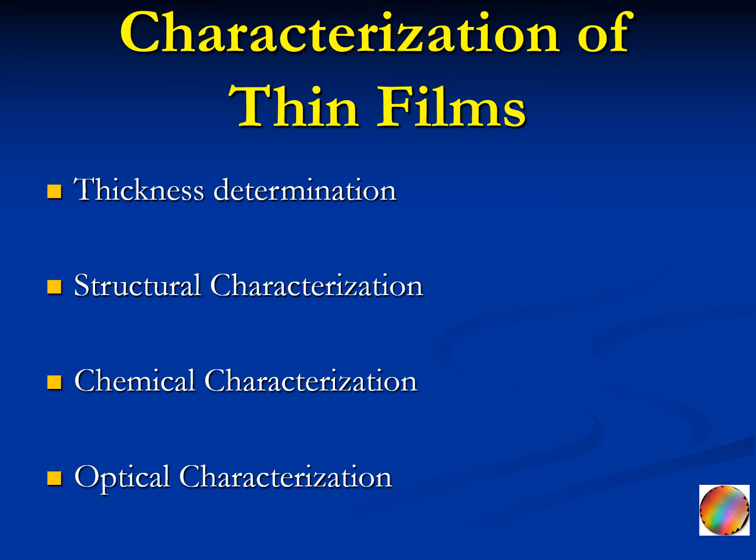We will just look at some of them: techniques to determine the thickness of the films, techniques to determine the structure of the film, techniques to determine the chemical composition of the films, and techniques to determine the optical properties of the films. These are again just examples of the many techniques we have seen in the list before.

The most important and direct technique to determine the thickness—thickness is a very important parameter for thin films, and many properties are dependent on it. The most direct technique to determine the thickness of the film is called surface profilometry, in which a very fine stylus, usually with a tip radius ranging from 0.2 to 25 microns, scans across the surface at a very light stylus force.

As the sample moves under the stylus and the stylus encounters various surface features, a vertical motion of the stylus is detected, and that produces a vertical structure showing the step height of the film, from which the thickness is determined.

Many techniques are used to determine the structure of thin films. The most important one is X-ray diffraction, which is based on Bragg's law. Here you bombard the sample with a beam of X-rays and observe the scattered X-rays using a device called a diffractometer, like the one shown in the middle.

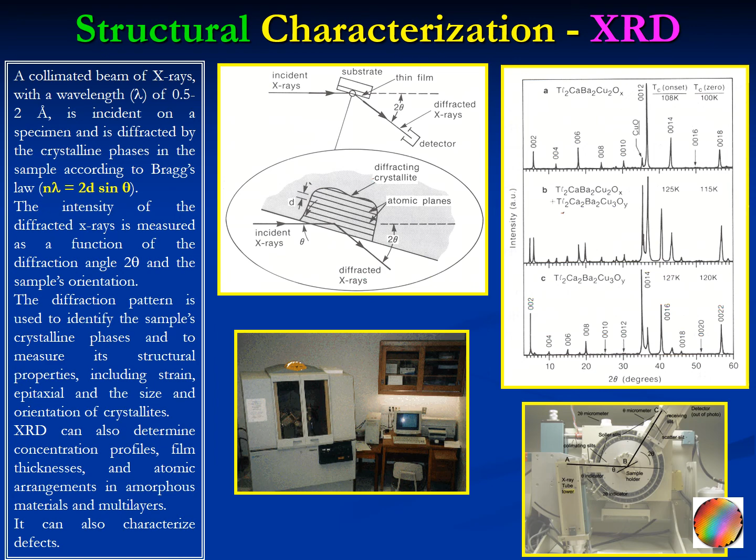From this pattern you can know the structural properties of the material, whether it's amorphous, epitaxial, or polycrystalline. You can also use these patterns to determine the grain size or lattice size, the degree of crystallinity, the presence of stress in the film, the lattice parameters, and the structure itself—whether it's cubic, hexagonal, or rhombic. A wealth of information can be obtained from an XRD pattern.

Scanning electron microscopy is a very powerful technique in which a beam of electrons is incident on the sample surface. It scans through the surface, and as it does so, we detect the reflected electrons. These can produce very powerful images on the micro or even sub-micron scale that show us the topography and morphology of the film, telling us a lot about the growth process and the suitability of the coating for certain applications.

A variant of this is transmission electron microscopy. Here the electron beam is not reflected but rather passes through the film, so it has to be a very thin film for the beam to pass through. Once it does, it is a very powerful technique that can tell us about the structure and crystallinity of the film.

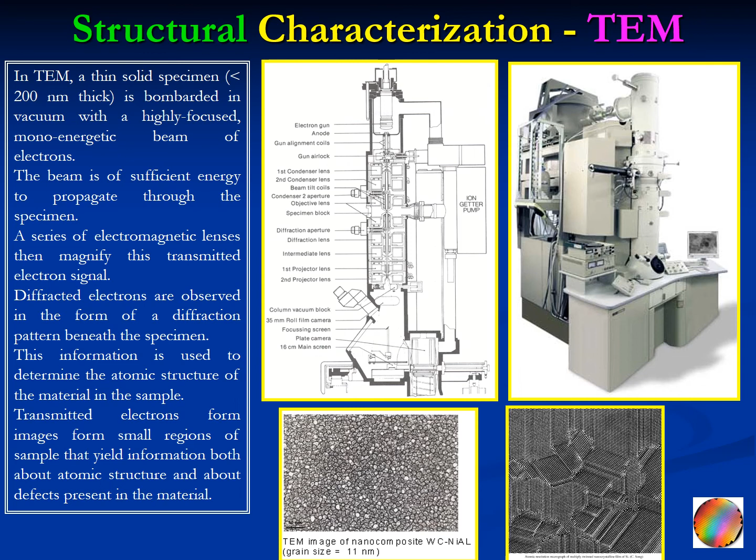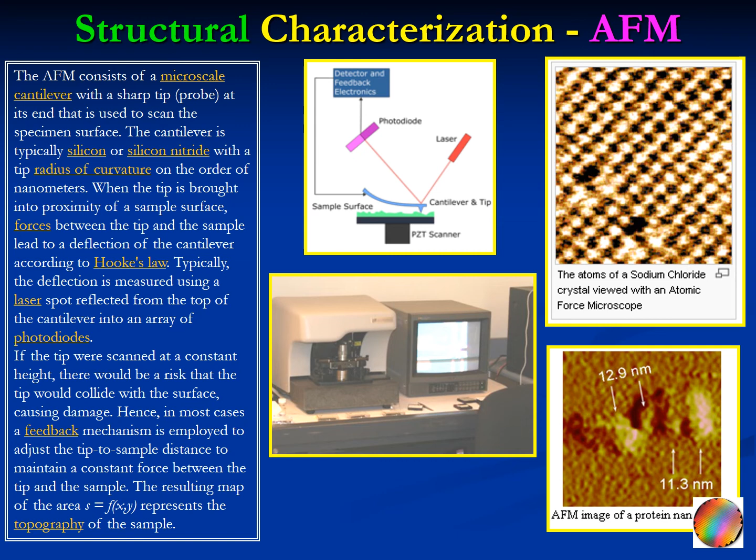In XRF, you detect the emitted X-rays from the sample. In XPS, you detect the photoelectrons emitted by the sample when bombarded by X-rays. This is a very powerful technique—it can tell us the composition of the film and, most importantly, the oxidation state of the elements making up the film, which can be extremely important in processes like catalysis, corrosion, and sensing. It is a surface technique, not a bulk technique, so it can only detect the few top monolayers of the film.

RBS, which stands for Rutherford Backscattering Spectrometry, is another powerful technique to study the chemical properties of films. It has many advantages. First, it is a bulk technique, not a surface technique like XPS—it can penetrate the whole film.

In that sense it is like XRF, but it has an added advantage over XRF: it tells us how the elements are distributed spatially along the thickness of the film. A third advantage of RBS is that it can detect the presence of hydrogen in the films.

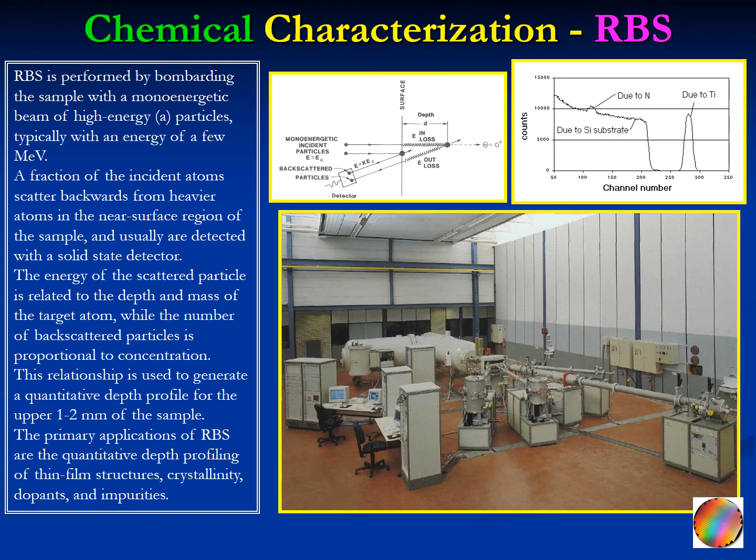The disadvantage is, as you can see in this picture, it requires huge equipment—a tandem accelerator like the one shown here. It is a very sophisticated technique that needs a lot of space and preparation to yield the desired spectrum.

Now let's look at some optical characterization techniques. The most widely used one is spectrophotometry, in which you bombard the sample with a beam of light and detect the reflectance, transmittance, or absorption of light through the film. This can tell you a lot about the material, such as its band gap and optical constants.

Another widely used optical technique is spectroscopic ellipsometry. Here you bombard the sample surface with a polarized beam of light, which reflects with a different state of polarization. By studying the state of polarization of the reflected beam and comparing it with the incident beam, you can determine the optical constants of the film, such as the refractive index, the absorption coefficient, and the extinction coefficient.

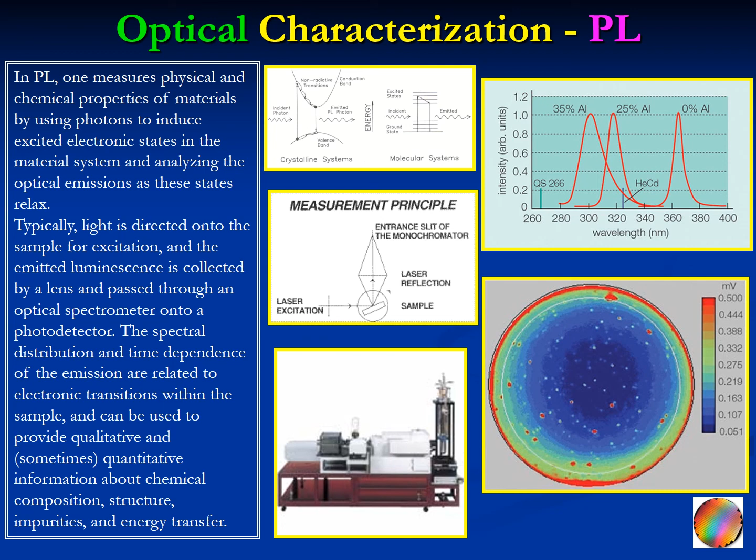A third optical technique is photoluminescence. We already talked about it before. Here is a typical instrument. You shine a laser, for example, on the sample. If the sample is optically active, it will emit light. You detect the emitted light, that's the luminescent light, and from there you can get a lot of information about the band gap, the defect states, their locations, and even the chemical composition of the sample. So these are some of the main or most important characterization techniques used to study the properties of thin films.

That finally brings us to the last part of this presentation, which is about the applications of thin films. Thin films are important in their own regard from a fundamental theoretical point of view, because they can tell us a lot about the properties of materials, and that's why we started the talk with materials research. So they are at the heart of materials research. But in addition to that, they have found plenty of extremely important applications in modern technology. Let's look at some of these applications.

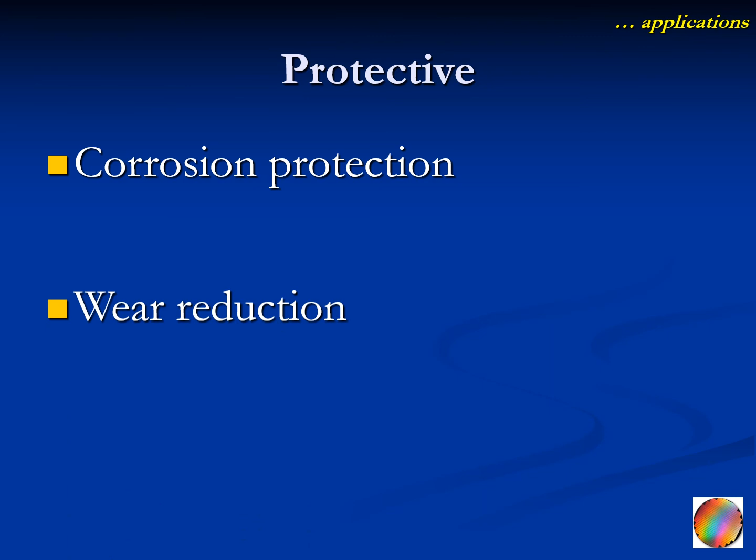We start with the most important one, which is the usage of thin films as protective coatings. Thin films are used to protect against corrosion, protect, for example, machines and pipes against corrosion. They are used in wear reduction to coat cutting elements or tools and protect them against wear. They are used to protect against oxidation, and most importantly, they are used as thermal barrier coatings.

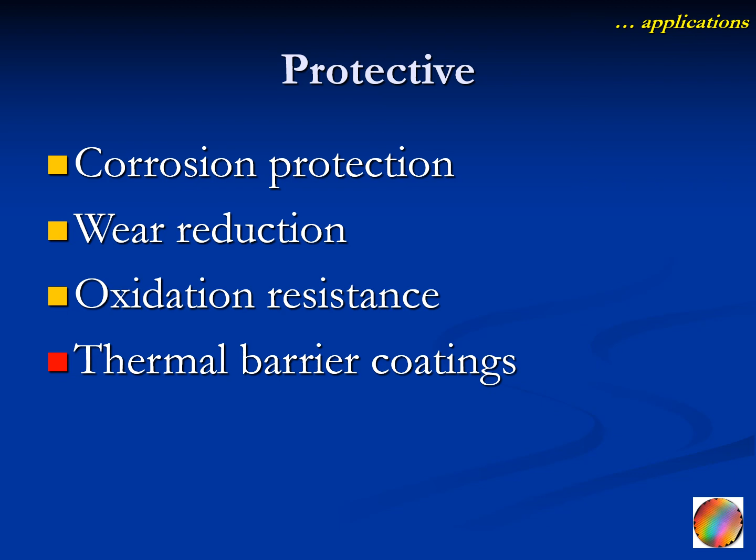The second class of applications of thin films is their application in energy-related fields, like their applications in photovoltaics and solar cells. These are heavily based on thin films, either as the active layers that interact with light to produce the electrons, or as transparent electrodes, or as metallic electrodes to carry the current into the external parts of the circuit.

Energy-efficient coatings present another example of the usage of thin films in energy applications. They are used to save or conserve energy in commercial buildings and automobiles. We can also have another class of these, which is called smart windows, that detect the change of the environment and accordingly change their properties and save the energy.

Thin films are used in the production of fuel cells for the production of energy. They are used in solid state batteries, and they can also be used in catalysis and polymers.

Optical applications of thin films have been the most traditional ones. They have been used initially for optical applications, and then came the other applications. So optically, thin films can be used to make mirror coatings, anti-reflection coatings to reduce the reflection of light and therefore allow as much light as possible to fall on the material. This is very important, for example, for solar cells.

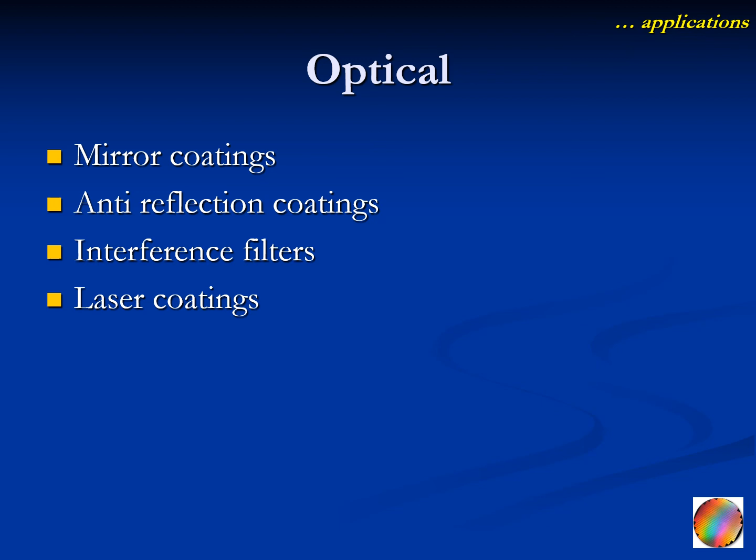They can be used to fabricate interference filters, which are used to pick or select a certain band of wavelengths and allow them to pass and reject the others. They are very important for laser coatings, laser cavities, semiconductor lasers, gas lasers, and they are of course used in ophthalmic coatings to make the glasses that we wear.

Optoelectronic applications of thin films include the production of light-emitting diodes, and we know now how important are these. Inherent in the production of LEDs, you definitely have thin film growth at one or more steps of the production. Likewise, they are heavily used in the production of laser diodes, which are heavily based on thin films. They are also used for the production of optical recording and data storage materials, and they are used in integrated optics, for example, in the form of waveguides.

Semiconductor applications of thin films have become extremely important. They are an integral part in the semiconductor devices that are used in microelectronics. They are also used in sensors and actuators, for example, in MEMS, micro electromechanical systems. Gas sensors are basically thin film in nature. Magnetic sensors, piezoelectric sensors are all coating based. Super lattices are based on thin films, as well as quantum wells.